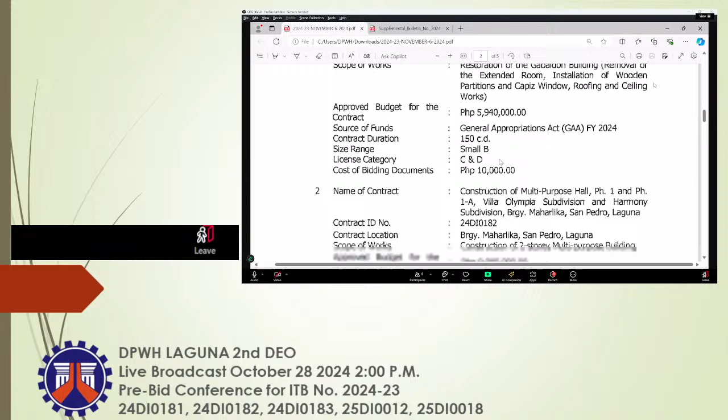For the second project: construction of multipurpose hall, Phase 1 and Phase 1A, Villa Olympia Subdivision and Harmony Subdivision, Barangay Maharlika, San Pedro, Laguna. Contract ID number 24DI0182, with an approved budget for the contract of 9,900,000. For the third project, contract ID number 24DI0183: construction of a 4-story, 8-classroom school building in Dita Elementary School, Barangay Dita, Santa Rosa, Laguna, with an ABC of 39,800,000.

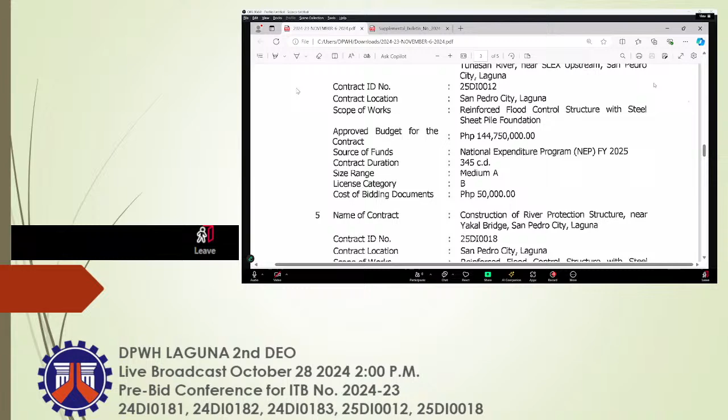Project number 4, contract ID number 25DI0012: construction of river protection structure along Tunasan River near SLEX Upstream, San Pedro City, Laguna, with an ABC of 144,750,000. For project number 5, contract ID number 25DI0018: construction of river protection structure near Yakal Bridge, San Pedro City, Laguna, with an approved budget for the contract of 49 million.

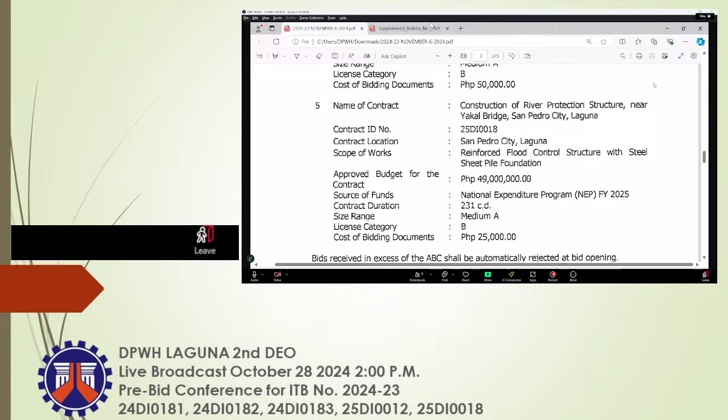We would also like to inform about supplemental bulletin number 2024-24, dated October 24, 2024, subject: postponement and resumption of the procurement activities for projects under ITB number 2024-23 with contract ID numbers 24DI0181 to 24DI0183, 25DI0012, and 25DI0018. This supplemental bulletin is issued to announce the postponement and resumption of the procurement activities for these projects.

Under ITB number 2024-23 with contract ID numbers 24DI0181 to 24DI0183, 25DI0012, and 25DI0018, which was posted on the DPWH website from October 18 to 24 and on PhilGEPS from October 18 to November 6, 2024, in view of the proclamation by Malacanang for suspension of government work in Luzon due to persistent rains and strong winds from severe tropical storm Christine.

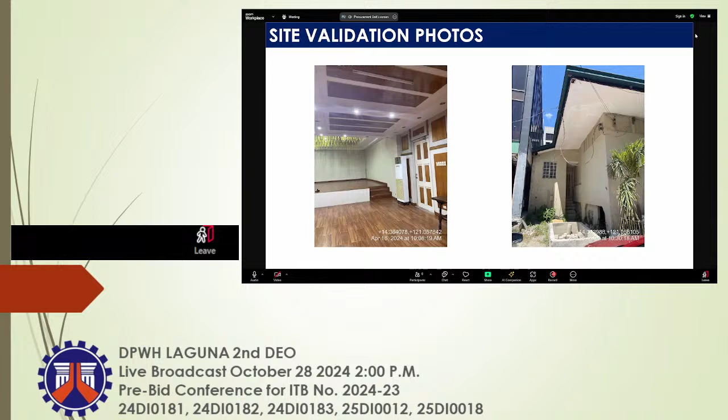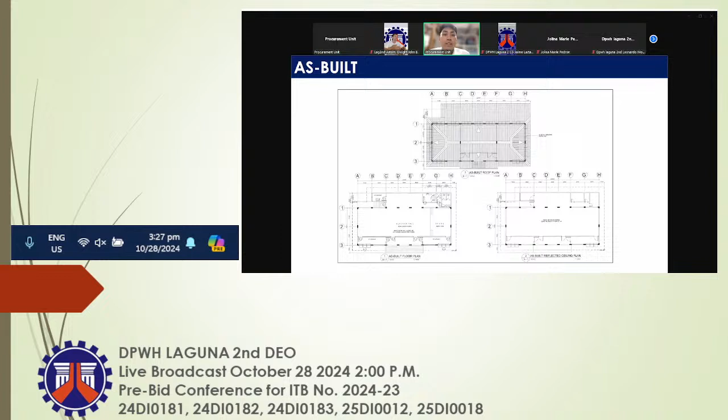Ito po, as reflected sa presentation, makikita po natin yung as-built niya. Meron po siyang extended na room sa likod, which is for removal na. At isa pong buong open area, isang buong function hall, na magiging 3 classroom na po. Ito po yung magiging itsura niya.

Ito po, makikita natin sa elevation niya, may mga capiz window po siya. Magpapalit din po tayo ng corrugated roofing, painting works, mga ganun po.

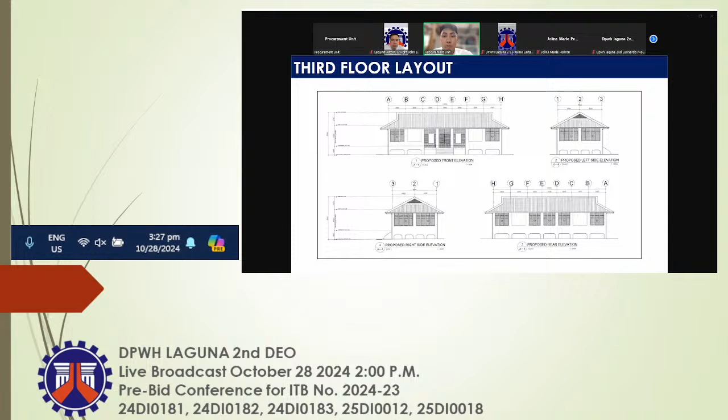So for the summary of quantities, we have Part A, construction of field office for the engineer, provision of furniture, fixtures, equipment, and appliances for the field office for the engineers, provision of progress photograph. Sa Part B po, other general requirements, we have permits and clearances, project billboard signboard, occupational safety and health, mobilization and demobilization, general scaffolding, shoring, netting.

For Part C po, earthwork, removal of structures and obstruction. For Part E po, we have catch basin, concrete, storm drainage and downspout, ceiling, wall frame, wood, finishing hardware, frames, wooden doors and window, corrugated metal roofing, fabricated metal roofing accessories, ridge rolls, flashing and gutters, glaze tiles and trims, cement floor finish, cement plaster finish, painting works ng masonry, wood and steel, varnishing, reflective insulation, CHB non-load bearing.

For electrical naman po, we have conduits, boxes and fittings, wires and wiring devices, panel board with main and branch breakers, lighting fixtures. For Part G naman po, mechanical, we have ventilating system and fire alarm system. So for the minimum requirement, we have backhoe 0.8 cubic meter, jackhammer, cutting outfit, air compressor, and dump truck.

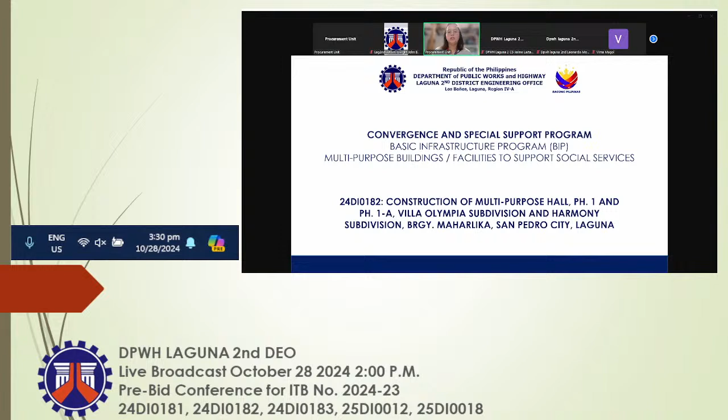For our project information, project allocation of 10 million, ABC of 9,900,000, EAW of 1%, equivalent to 100,000. Duration of 180 calendar days. Net dimension of the building is 13.21 meters by 10.15 meters. And then for our scope of works, construction of 2-story multipurpose building.

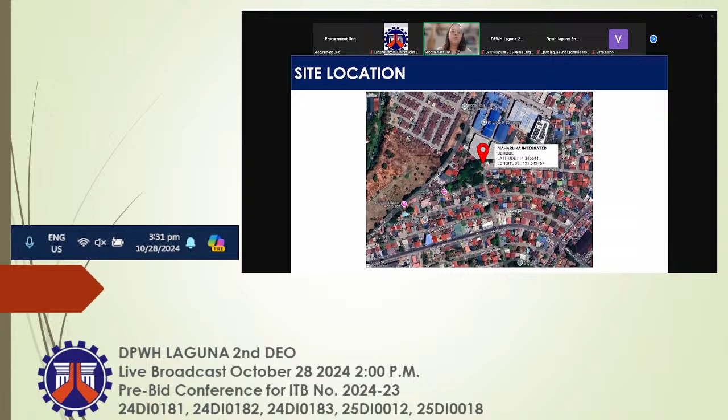So ito po yung site location natin, sa gagawan po siya is within Maharlika Integrated School. So ito po yung gagawin pa lang natin na building. Ito po yung ating site validation. So medyo mataas lang po yung existing ground line, natural grade line natin dito. So ang mangyayari po natin, ang slab on grade natin is elevated din po siya, same po na elevation from the existing building sa tabi niya.

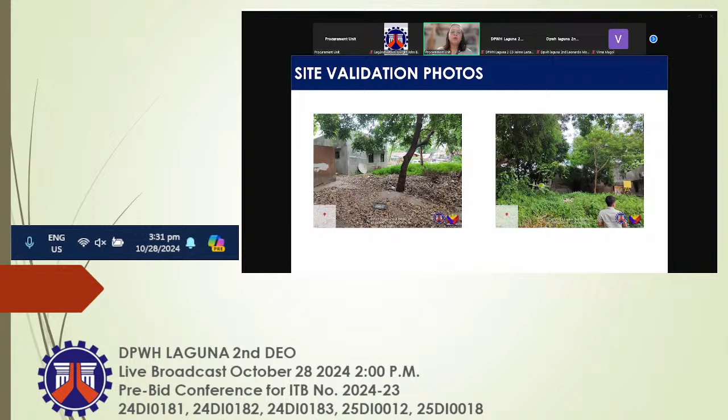For our floor plan, ito po yung ating ground and second floor plan. Dito po meron po tayong for ground floor plan, iba't ibang rooms na available po natin, including na po dito yung ating partitions. Then for second floor plan, meron po tayong room 1 and multipurpose room. Included po sa second floor plan is yung ating kitchenette, at yung ating mga toilet and storage po. Ito naman po yung ating elevation, front elevation and left side elevation.

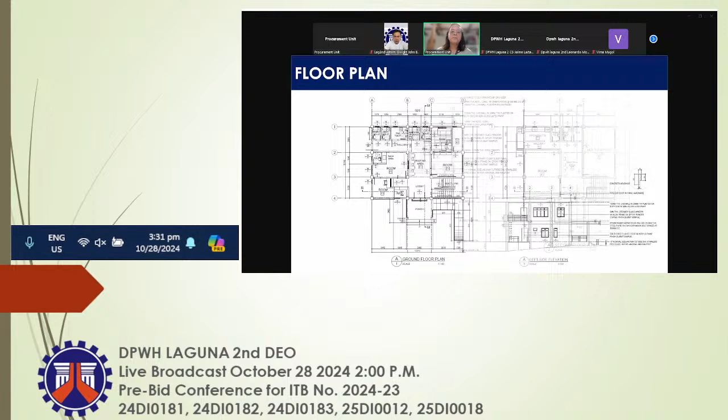So ito po yung ating program of works. Then for our summary of quantities, based dito, ang ating pong building na gagawin, ang ating two-story building na gagawin is fully furnished naman po siya. So dito po is Part A, facilities for the engineer.

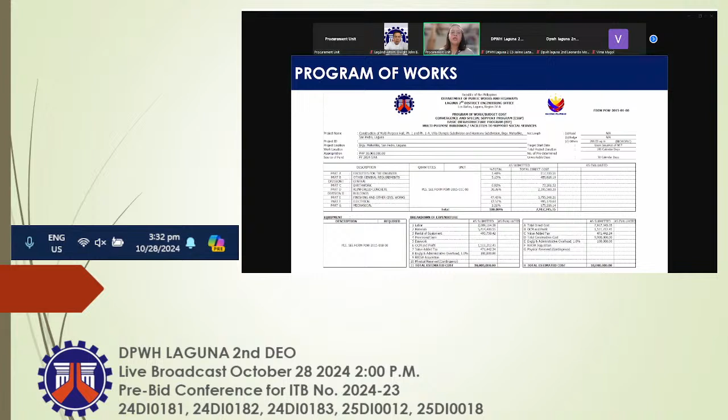Part B, other general requirements, including po dito yung permits and clearances, project delivery and signboard, occupational safety and health, mobilization, demobilization, general scaffolding, shoring and netting, and then ramp. Yung ramp po na ating PI din po dito is for tactile blocks. Then for Division 1, general.

So for earthwork po, meron po tayong isang tree na kailangan pong putulin. Then yung ating building excavation and then gravel fill po. For Part D, reinforced concrete, 3,000 PSI yung ating gamit dito, with rebar steel na deformed grade 40, grade 60, and then formworks and false works.

For finishing and other civil works, catch basin. So ito po yung mga main items na ginagamit natin for our multipurpose building. Same thing with electrical, conduit boxes and fittings, wires and wiring devices, panel board with main and branch breakers, and lighting fixtures. Then for mechanical is ventilating system and fire alarm system. That's all po, thank you.

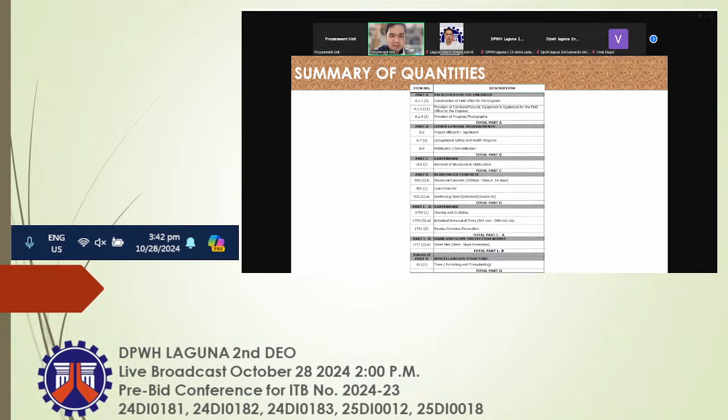Then we have removal of structures and obstruction, structural concrete, clean concrete, reinforcing steel, clearing and grubbing, individual removal of trees, surplus common excavation, sheet piles, then our trees.

Minimum equipment requirement: 1 backhoe, 2 dump trucks, 1 vibro hammer, 1 welding machine, 1 bagger mixer, 1 water truck pump, 1 payloader.

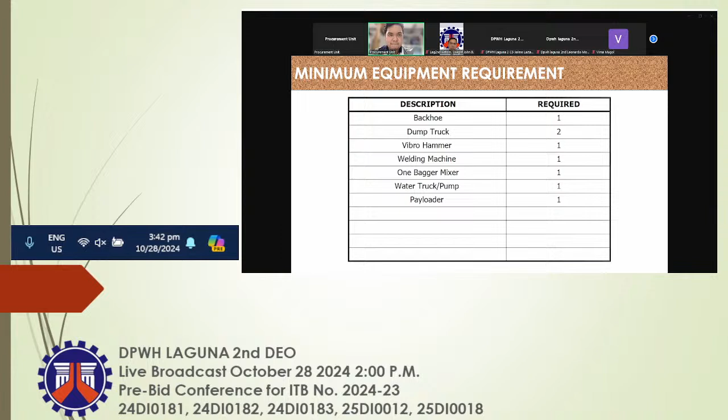So this is our project location.

So, for our last project, 25 DI-18, construction of river protection structure near Yakal Bridge, San Pedro City, Laguna.

Scope of work: reinforce flood control structure with steel sheet pile foundation.

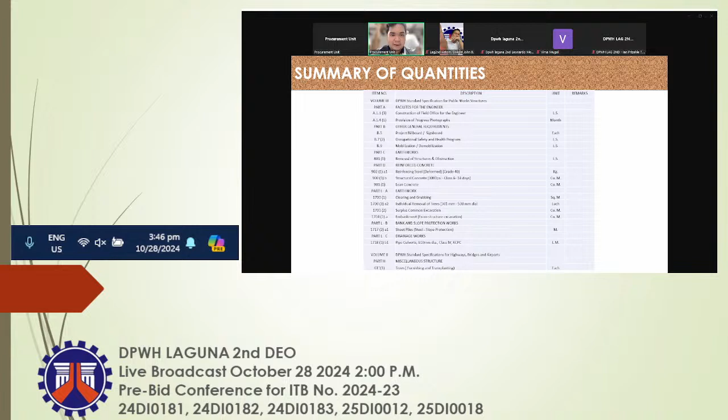Minimum equipment requirement: 1 backhoe, 2 dump trucks, 1 vibro hammer, 1 welding machine, 1 bagger mixer, 1 water truck pump, 1 payloader.

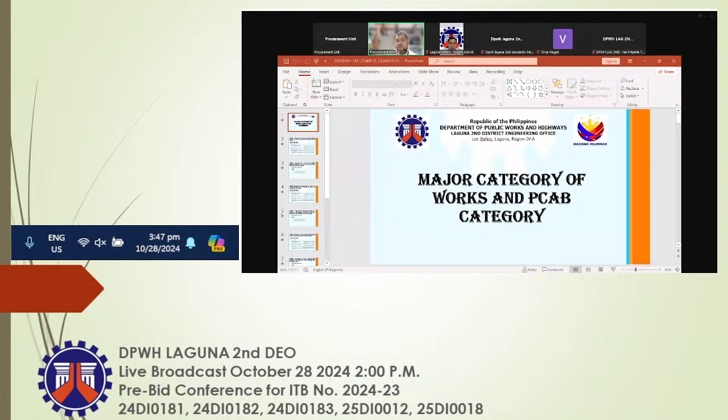Hello, good afternoon, everyone. For the major category of works and PCAB category.

For 24 DI 0181, reconstruction of multipurpose building, Gabaldon Building, San Pedro Central Elementary School, San Pedro City, with an ABC of 5,940,000.

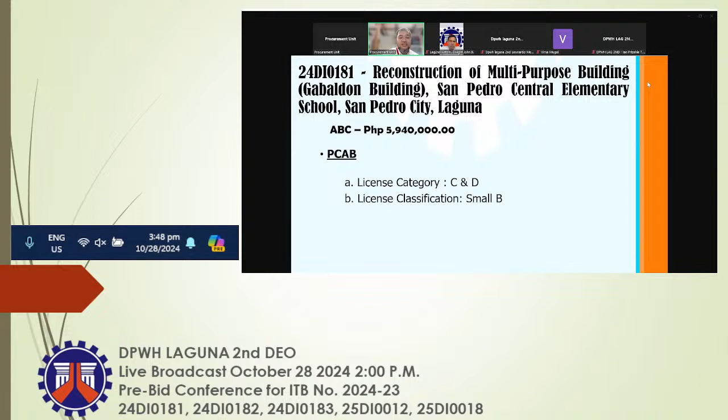Major category of works. The following is the major category of works involved in the contract to be bid: buildings, construction without piles, low-rise, concrete frame, 1 to 5 stories, BICWOPLC. For the following similar categories of works, it is indicated as follows: for the PCAB license category, C and D, and the PCAB license classification, small B.

For the next project, 24 DI 0182, construction of multipurpose hall, Phase 1 and Phase 1A, Villa Olympia Subdivision and Harmony Subdivision, Barangay Maharlika, San Pedro, Laguna, with an ABC of 9,900,000 pesos. Major category of works.

It involves the building construction without piles, low-rise concrete frame, 1 to 5 stories, BICWOPLC. For the similar category of works, it is described as follows: PCAB license category, C and D, and PCAB license classification, small B.

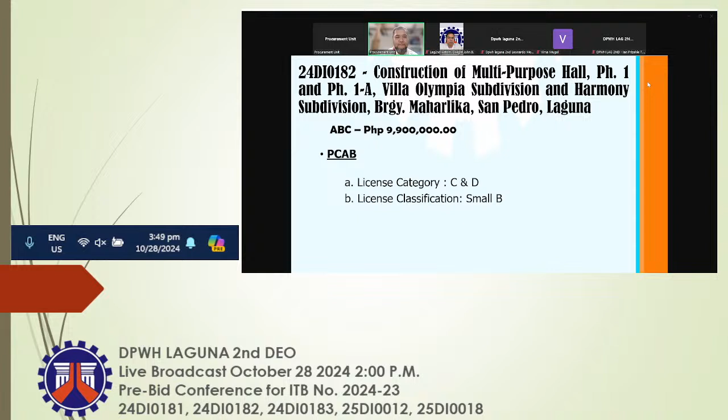For the next project, 24 DI 0183, construction of 4-story, 8-classroom school building in Dita Elementary School, Barangay Dita, Santa Rosa, Laguna, with an ABC of 39,800,000 pesos only.

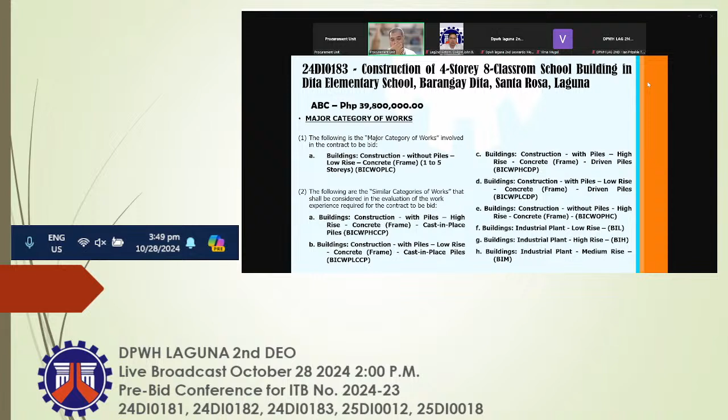For the major category of works: buildings, construction without piles, low-rise, concrete frame, 1 to 5 story, BICWOPLC. For the similar category of works, it is described as follows: PCAB license category B, and PCAB license classification, medium A.

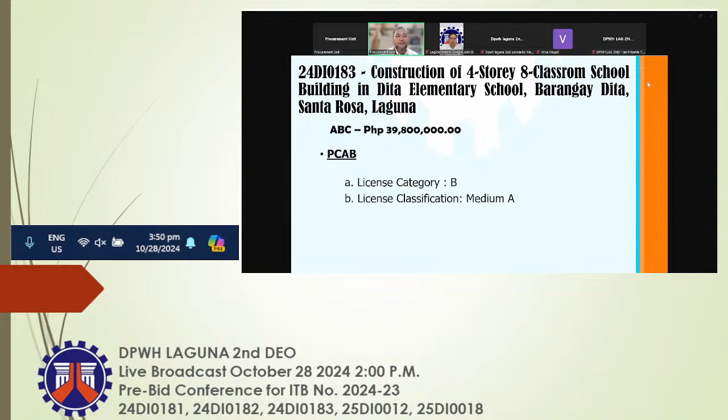For the next project, 25 DI 0012, construction of river protection structure along Tunasan River near SLEX Upstream, San Pedro City, Laguna, with an ABC amount of...

144,750,000 pesos only. For the major category of works, it involves in the contract to be bid: flood control construction, slope protection using structural measures such as revetment, retaining wall structures, and wire net, or FCSPS.

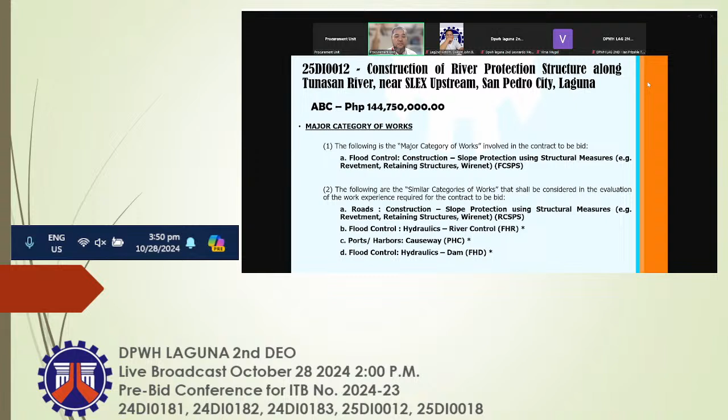For the similar category of works, it is indicated as follows: PCAB license category B and PCAB license classification medium A.

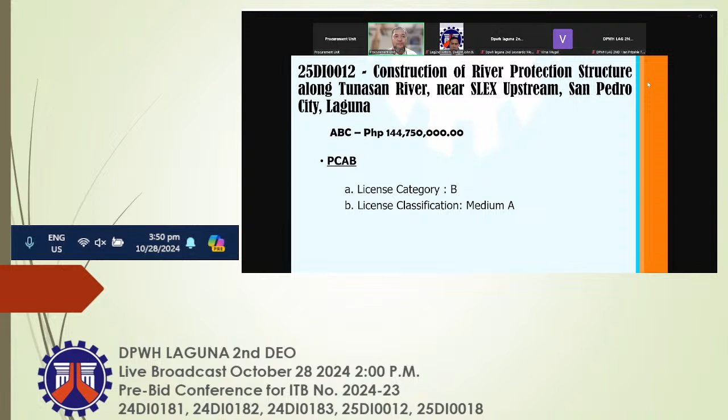For the next project, 25 DI 0018, construction of river protection structure near Yakal Bridge, San Pedro City, Laguna, with an ABC of 49 million pesos only.

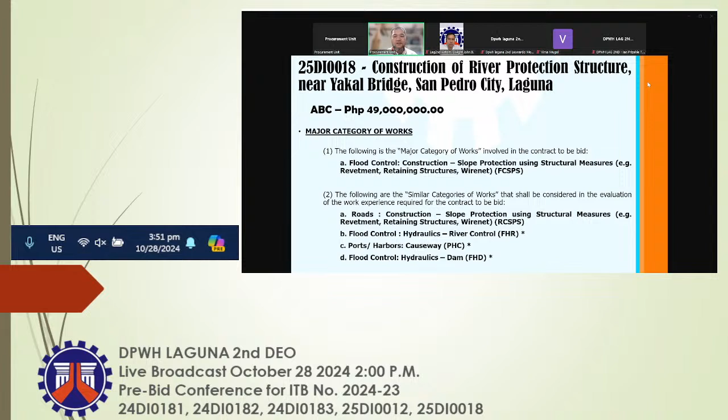The major category of works: flood control construction, slope protection using structural measures such as revetment, retaining structures, and wire net, or FCSPS. For the similar categories of works, please refer as follows: PCAB license category B and PCAB license classification medium A.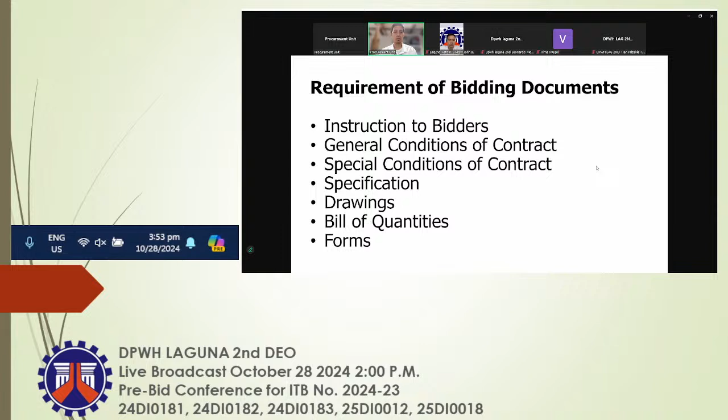Requirement of bidding documents: instruction to bidders, general conditions of contract, special conditions of contract, specification, drawings, bill of quantities, and forms. For eligibility requirements or technical component, also known as envelope number 1, for Class A documents,

legal documents, PhilGEPS registration certificate, valid PhilGEPS registration certificate, platinum membership in accordance with Section 8.5.2 of the IRR.

And for the technical documents, statement of the prospective bidder of all its ongoing government and private contracts, including contracts awarded but not yet started, if any, whether similar or not similar in nature and complexity to the contract to be bid. Single largest completed contract, or SLCC.

Statement of the bidder's single largest completed contract similar to the contract to be bid, except under conditions provided under the rules. Special PCAB license in case of joint ventures and registration for the type and cost of the contract to be bid.

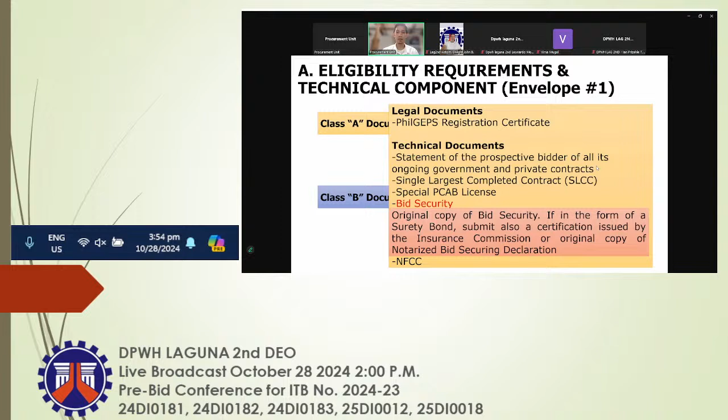Original copy of bid security, if in the form of a surety bond. Submit also a certification issued by the Insurance Commission or original copy of notarized bid securing declaration.

For the project requirements: A, organizational chart for the contract to be bid. B, list of contractor's key personnel, including project manager, project engineers, materials engineers, and foremen, to be assigned to the contract to be bid, with their complete qualification and experience data.

And C, list of contractor's major equipment units, which are owned, leased, or under purchase agreements, supported by proof of ownership or certification of availability of equipment from the equipment lessor or vendor for the duration of the project, as the case may be. Experience means total years of civil works experience of any nature in construction and engineering

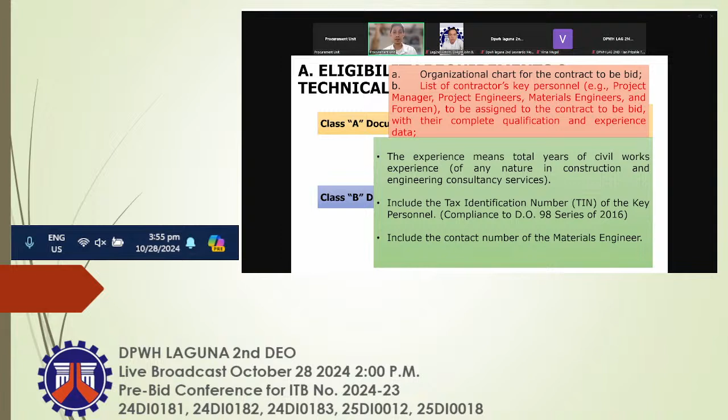consultancy services. Include the tax identification number of the key personnel, and also include the contact number of the materials engineer. Accredited safety officer required upon issuance of notice of award, subject to DO 98 series of 2014, or the

submission of construction safety and health program by the Department of Labor and Employment. First aider with certificate of training issued by Red Cross in compliance to DOLE requirement for the approval of construction safety and health program.

Required upon issuance of notice of award, also subject to DO 98 series of 2014.

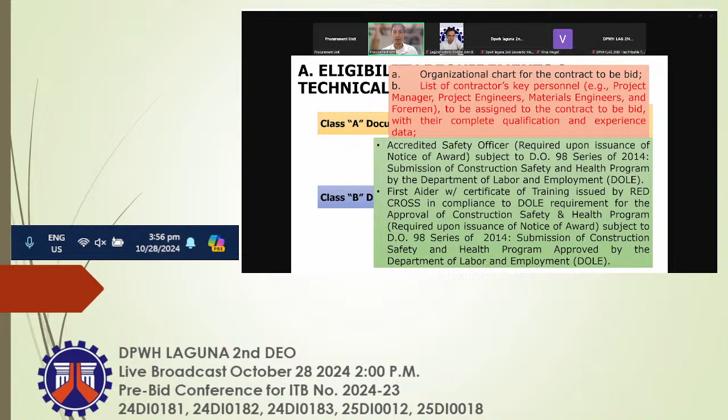Implementation of Section 3 of Department Order Number 118 series of 2024 regarding the assignment of accredited contractors and consultants' project engineers to DPWH projects, which supersedes DO 94 series of 2020 and DO 156 series of 2023.

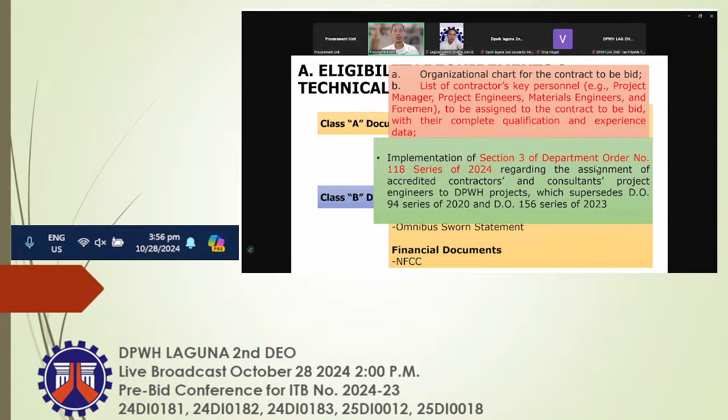These are the classification and the limits of assignment. For PE2, 10 contracts located within the same province for simultaneous assignments, each costing more than 150 million. For PE1, 11 contracts located within the same province for simultaneous assignments, each costing 100 million to 150 million.

And for the provisional project engineer, 10 contracts located within the same province for simultaneous assignment, each costing less than 100 million.

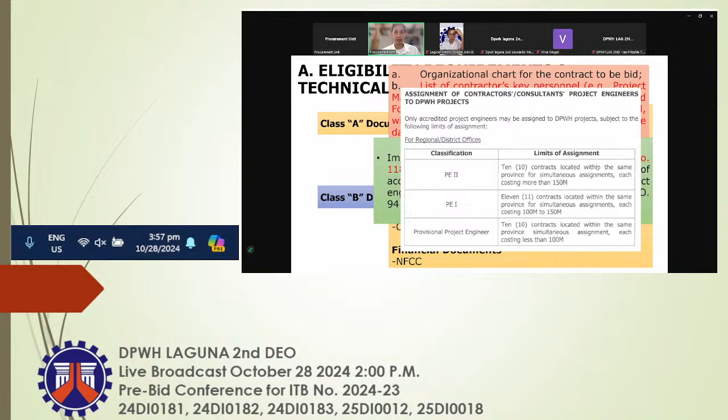Omnibus sworn statement: original duly signed omnibus sworn statement, and if applicable, original notarized secretary's certificate in case of a corporation, partnership, or cooperative, or original special power of attorney of all members of the joint venture, giving full power and authority to its officer to sign the OSS and do acts to represent the bidder.

NFCC, the net financial contracting capacity of the bidder, shall be used in the eligibility processing. Prospective bidder must have an NFCC at least equal to the ABC to be procured, as follows.

NFCC equals the difference of current assets and current liabilities, multiplied by 15, and the value of portions will be subtracted of all outstanding works under the bidder's ongoing contracts, including awarded contracts to be started, which portions coincide with the contract to be bid.

In the NFCC, the fixed factor of 15 shall be used in the computation of NFCC regardless of the contract duration.

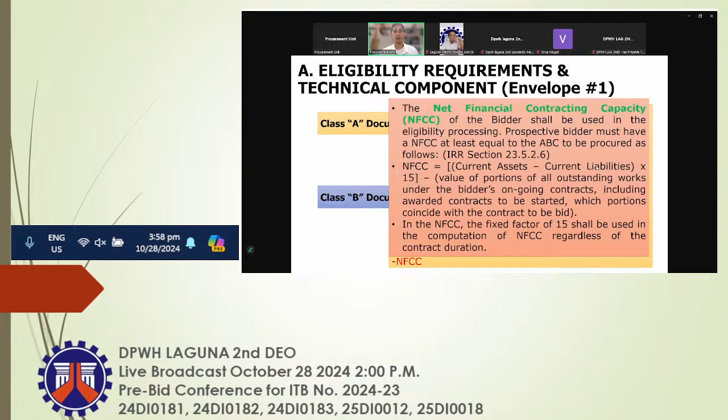For Class B documents: special PCAB joint venture license and valid joint venture agreement, if applicable. Duly signed joint venture agreement in accordance with RA number 4566 and its IRR in case the joint venture is already in existence, or duly notarized statements from all the potential joint venture partners stating that they will enter into and abide by the provisions of the JVA in the instance that the bid is successful.

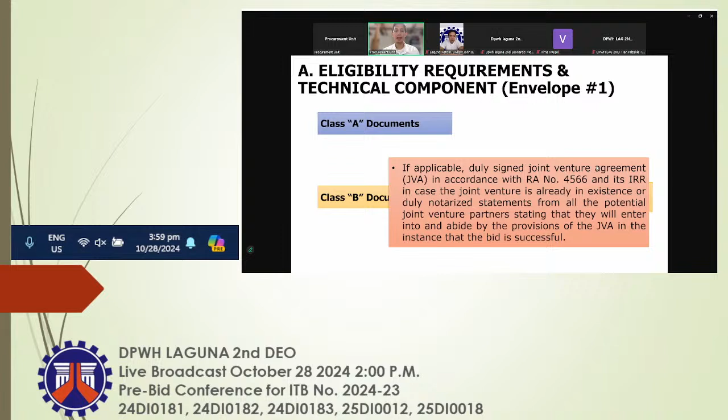For financial envelope, or envelope number 2: financial bid form must be in accordance with the form prescribed. Bill of quantities, bid prices in the bill of quantities. Detailed estimates, including a summary sheet indicating the unit prices of the construction materials, labor rates, and equipment rentals used in coming up with the bid.

Cash flow, quarterly, monthly cash flow, and payment schedule.

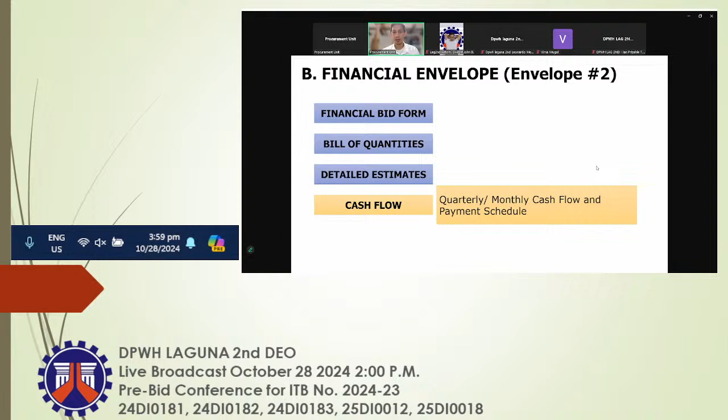Instruction to bidders under ITB Clause 20 from the bid data sheet.

The bidder shall submit one original and two copies of the first and second component, the technical and financial component of its bid, written in indelible ink and signed by the bidder or its duly authorized representative. All envelopes shall...

A. Contain the name of the contract to be bid in capital letters. B. Bear the name and address of the bidder in capital letters. C. Be addressed to the procuring entity's BAC. D. Bear the specific contract identification of this bidding process. E. Bear a warning: do not open before the date and time for the opening of bids.

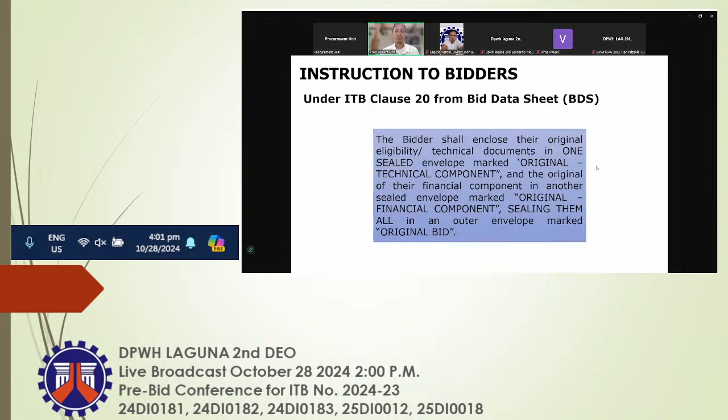The bidder shall enclose their original eligibility and technical documents in one sealed envelope marked original technical component, and the original of their financial component in another sealed envelope marked original financial component, sealing them all in an outer envelope marked original bid.

Each copy of the first and second envelopes shall be similarly sealed, duly marking the inner envelopes as copy number 1 or 2 technical component and copy number 1 or 2 financial component, and the outer envelope as copy number 1 or 2.

These envelopes containing the original and copies shall then be enclosed in one single envelope.

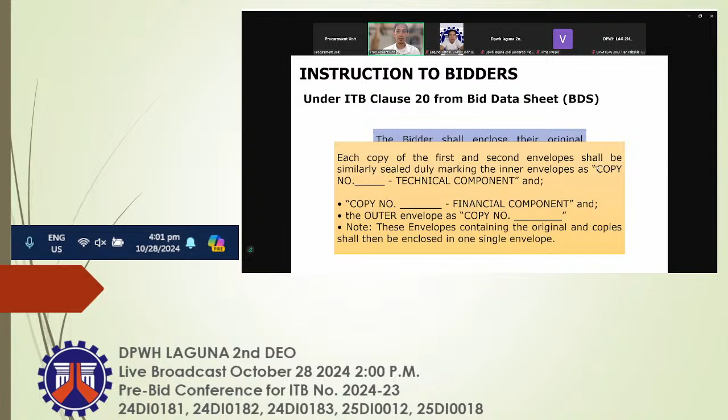The bid documents, both technical and financial proposal, must be book-bound or fastened at the left side with ear tag, in A4 size bond paper, font size 10 or up, in 70 to 100% scale, with documentary stamps, and paginated as per DO number 90, series of 2002.

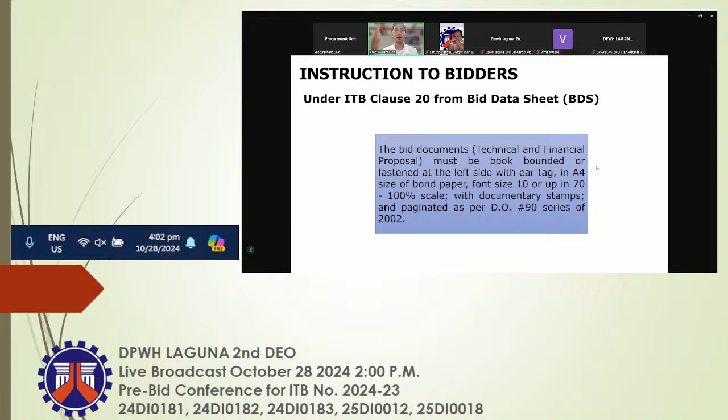Please refer to DO number 11, series of 2017, for the minimum materials testing equipment, and DO number 127, series of 2018, for the strict application of RA 9184 in the conduct of post-qualification of bidders with delayed ongoing contracts with the DPWH. DO 11 series of 2017 covers the inclusion of the minimum materials testing equipment in the technical component of the bid.

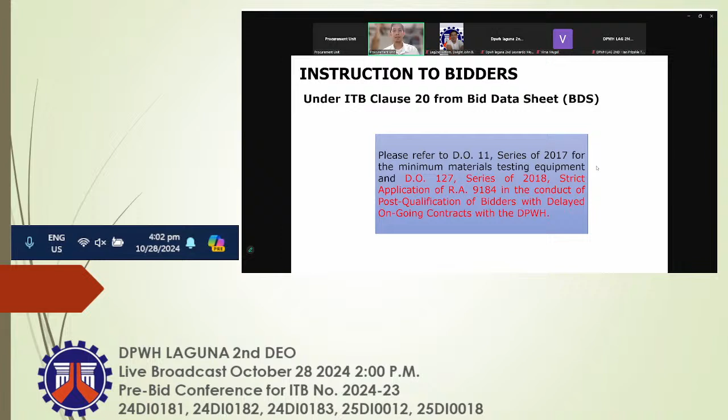Admission and receipt of bids.

Legal references: Department Order Number 87, Series of 2020 - Electronic submission and receipt of bids for the procurement of civil works contracts.

GPPB Resolution Number 09-2020, dated May 7, 2020, approving measures for the efficient conduct of procurement activities during a state of calamity or implementation of community quarantine or similar restrictions, authorizing the submission and receipt of bids through electronic means or email.

2016 Revised IRR of RA 9184. Electronic submission and receipt of bids procedures.

Number 1: Post the invitation to bid and bidding documents. Responsible person: BAC Secretariat. Rules: Must be posted on the DPWH and PhilGEPS website, and at any conspicuous place, for 7 calendar days per Section 21 of the IRR of RA 9184.

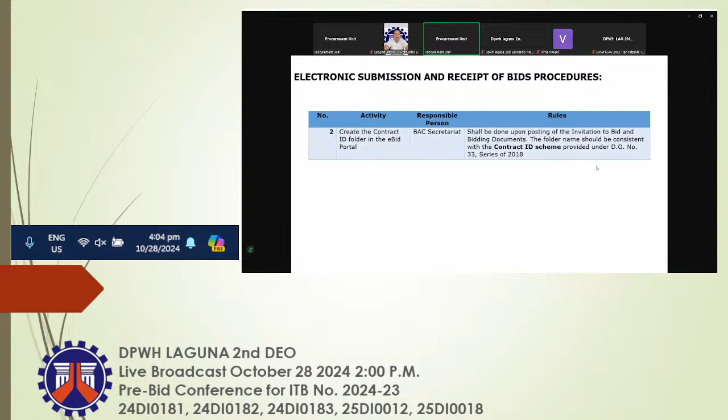Number 2: Create the contract ID folder in the eBid portal. Responsible person: BAC Secretariat. Rules: Shall be done upon posting of the invitation to bid and bidding documents. The folder name should be consistent with the contract ID scheme provided under DO number 33, series of 2018. Here are the examples.

Number 3: Purchase the bidding documents. Responsible person: Contractor. Rules: Section 17.4 and Appendix 8, guidelines on the sale of bidding documents of the IRR of RA 9184.

Number 4: Send the proof of purchase of bidding documents, official receipt. Responsible person: Contractor. Rules: Item number 3A of DO number 87, series of 2020. File format: PCAB ID underscore contract ID underscore official receipt dot PDF. Email subject format: Official receipt for contract ID. Must be in PDF, and must be sent prior to the deadline of submission of bids.

Only bidders with system-accepted proof of payment shall be allowed to submit their electronic bids. Here are the examples.

Number 5: Send the electronic bid. Responsible person: Contractor. Rules: Item number 3D, 3E, 3I, and 3M of DO number 87, series of 2020. File format: PCAB ID underscore contract ID underscore B dot zip, dot rar, or 7z. Email subject format: Bid submission of contract ID. Must be in a password-protected archive format, containing 2 password-protected archive files, the technical and the financial proposal.

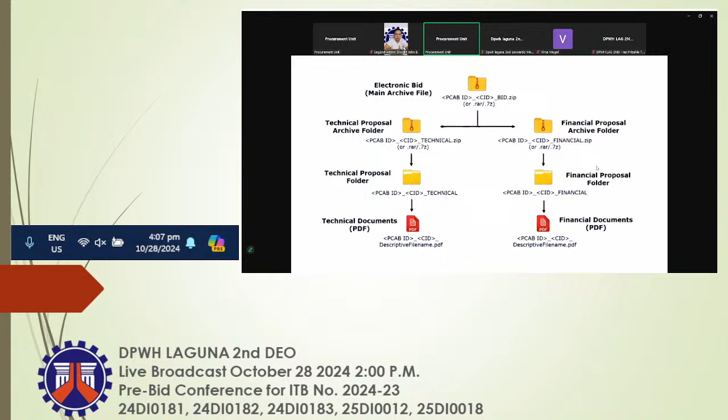Electronic bid, main archive file. Under these are the technical proposal archive folder and the financial proposal archive folder. Under the technical proposal archive folder is the technical proposal folder, and under the technical proposal folder is the technical documents PDF. Under the financial proposal archive folder is the financial proposal folder, and under this is the financial documents PDF.

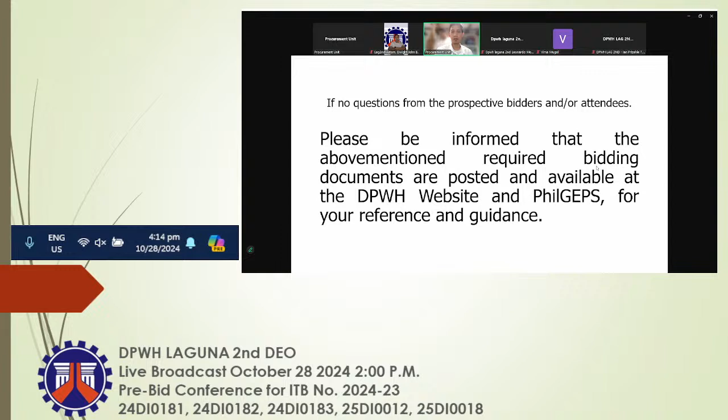And for electronic submission, you can send it through electronicbids_Laguna2 at dpwh.gov.ph. Please be informed that the above-mentioned required bidding documents are posted and available at the DPWH website and PhilGEPS for your reference and guidance.